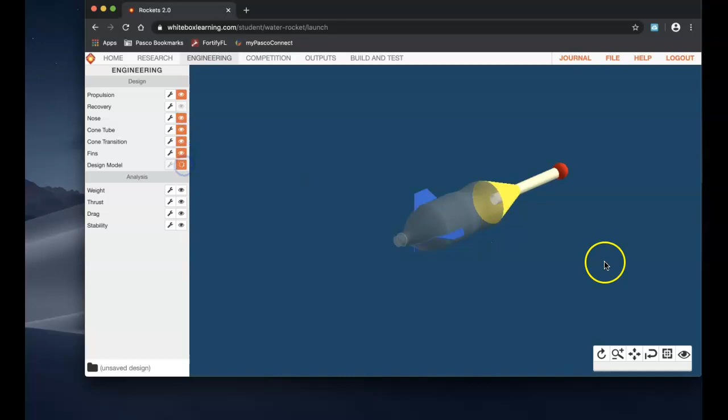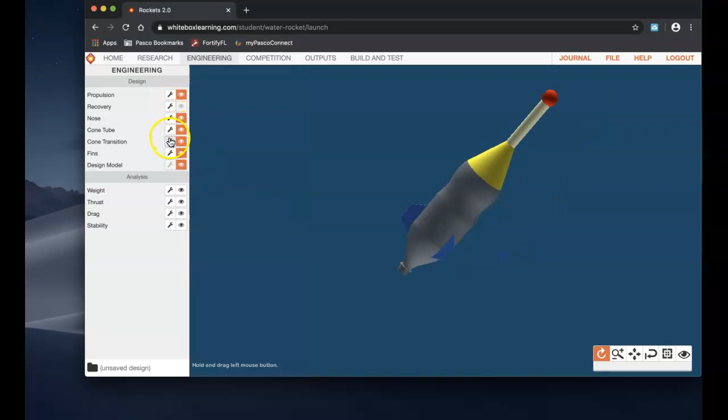Go to engineering. I'm gonna turn all these on just to see what my rocket looks like. Okay, there's your rocket. The nose length, it's talking about this vanilla colored looking thing right here. I'm assuming it's in the nose, and it is not. So I'm just done. Maybe under cone tube. That's actually what it is. I think it was 228. Was it? Hold on, we gotta go check.

228. So I'm just gonna make that smaller. Let's just drop this down to, let's say, 150. Apply. Okay, so let's go to outputs and make sure that our nose is good to go. All right, so that's taken care of. We can forget about that.

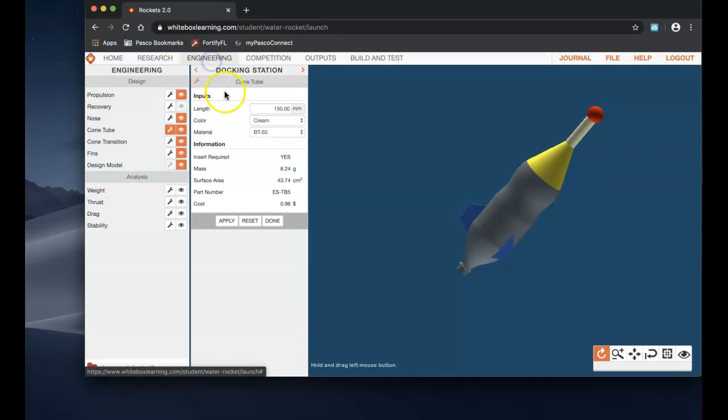I know what this parachute thing is, and I'm going to do that last. But let's go ahead and focus on our fins. Okay, so our minimum is 77, and we're at 17. So we need to probably significantly raise the size of our fins. So I'm going to push done on this. I'm going to look at my fins. And surface area, guys, hopefully you know area, okay, length times width. In order to increase that, we just need to increase our length and our width.

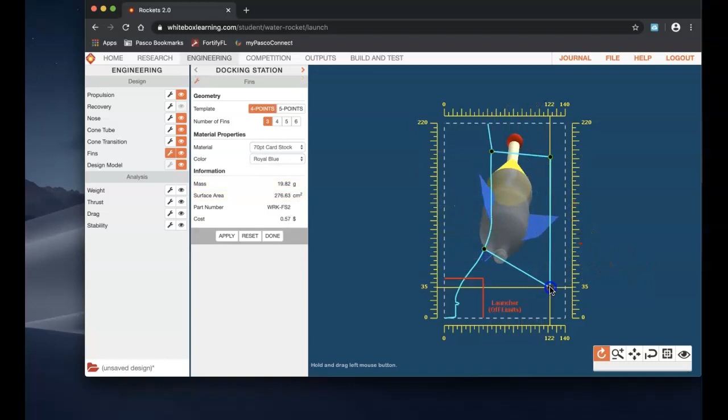You can spend a ton of time on this, making it the best that you can. But just for time's sake, I'm going to throw something together that at least is going to get me in spec. This is showing me right here an updated version of my surface area. I don't know if that is all three combined or what. So let's just go look and see if we're good. Okay, so we got 98 centimeters squared. We're good there. Again, you can go back and redesign. You can add more fins.

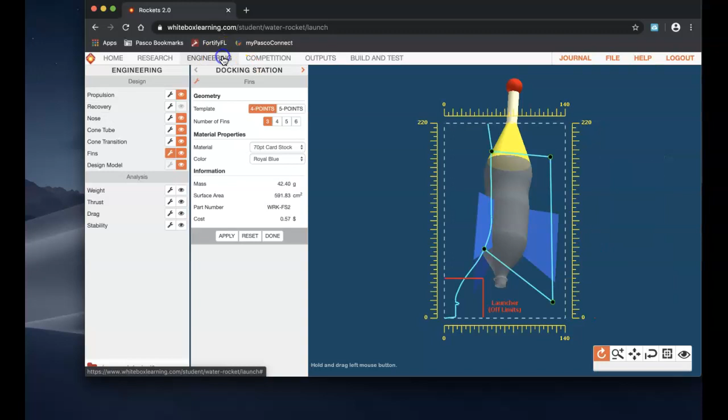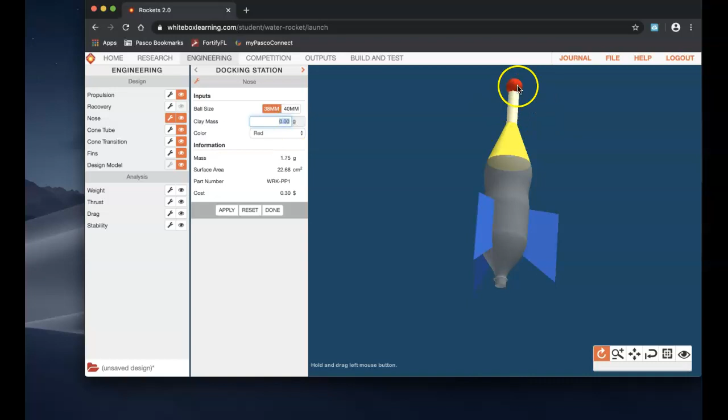But the last thing we want to do to get in spec is to make sure our parachute deploys. And I get this question a lot when we're in class doing this at school, and the problem here is going to be, I think it's in cone. It's the clay mass. I just got to figure out where it is. Probably nose. Yeah, you're gonna want to add clay mass to the nose. Okay, so I think 20 grams would be enough. We're gonna hit apply. Go to outputs. Let's see if we're in spec. Okay, so technically, again, we're done.

If you want to compete, I encourage you to compete. You have to save your, I don't know if you remember this, but you just go file, save, give a name, save and enter competition, and that's how you can compete with everybody in the district. All the schools that are teaching this course will all be in the same batch. So when you go to competition, you'll be able to see people from all sorts of different schools and things like that. Okay. Click on district to do that.

If you just want to compete with your particular class period, go to classrooms. If you want to compete with our school, just John Long, then you can do that. But I would suggest going to district and competing with others across the district. That would be a pretty fun thing to do if you enjoy it. But if again you're limited on time, you got to share your computer with siblings, then just make sure to get your thing in spec and you got your grade.